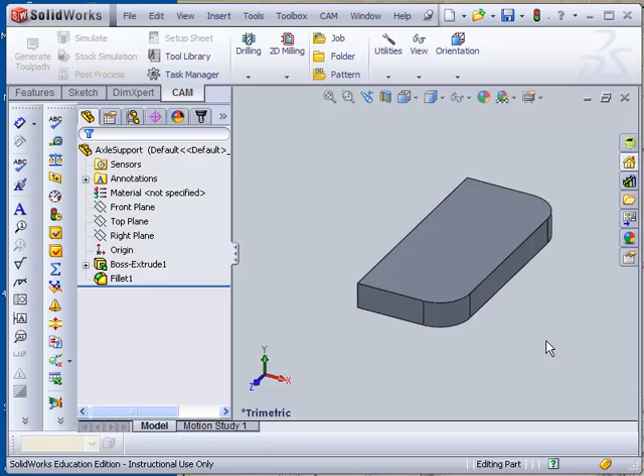This is video 2 in the axle support, and what I'm going to do now is to move this around and add that part that comes down as an extension. We'll go take a look at it from the left hand side, zoom out a little bit. I'm going to hold the control key down and just pan up.

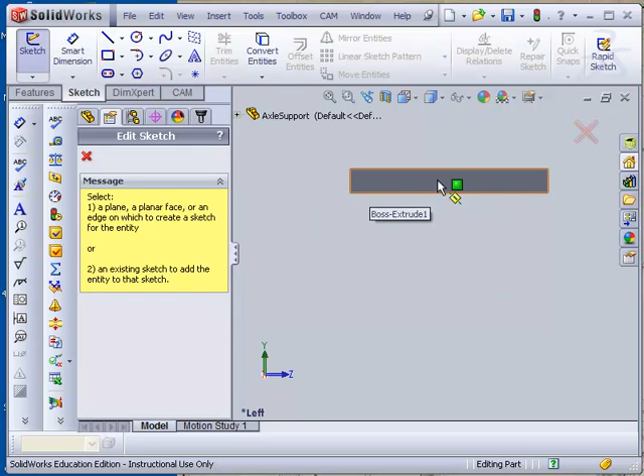I'm going to start by going to sketch, and because this is a symmetrical part, I'll start by putting a center line. I'm going to sketch on that surface right there, on that plane. Go up above the origin, left click, go down through the origin. Center line is black. Now I'm going to draw a circle on the center line. I'm going to bring it out so it's close.

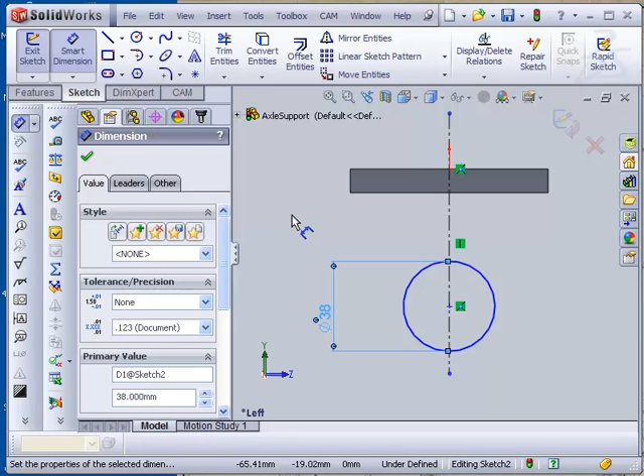Start adding some dimensions. The radius of that is 19, so the diameter would be 38. Now I'm going to put a dimension from here to the center of the circle. The distance down is 48. That puts it in place. Now we can start adding the sketch lines.

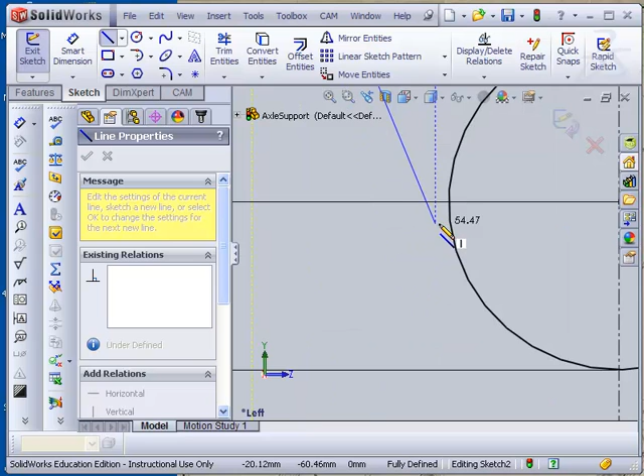I'm going to start by sketching on this edge, right where it intersects. And you see I get a midpoint. Left click, go to the corner, left click. Now what I want to do is to come right in and make this line coincident with that circle, but also, you'll notice as I drag down a little bit, tangent. So that second little glyph that shows up right there, that's tangency. Now that line will both touch the circle and be tangent to it.

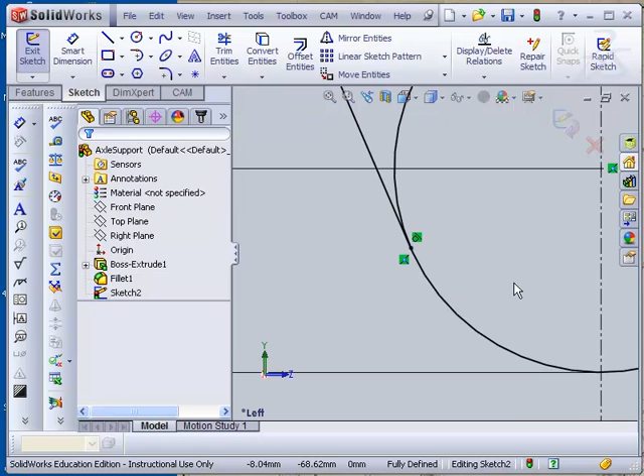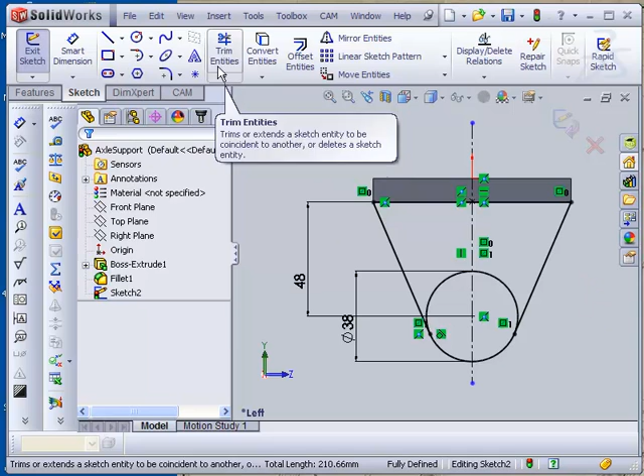Hit the escape key, come back out. I'm going to use the mirror option for the sketches and take that line and this line, mirror them about my center line so they look like that. Pick the OK button. Now what I've got is the whole thing sketched out. A couple ways to go from here, but I'm going to start by trimming out, using the trim command, that part of the circle and this part of the circle. I have now a fully defined sketch.

I can go over to the Features tab, do an extrusion, bring it around a little bit, switch it so it goes the other way, select the green button. Now that part's in place. Now the other thing left to add, for right now, at least in this video, is the raised boss.

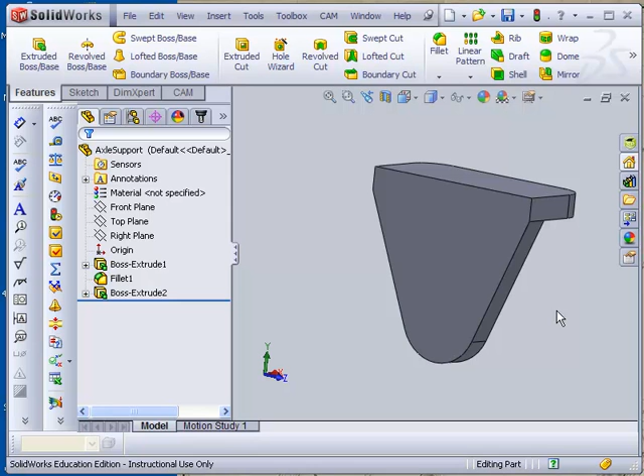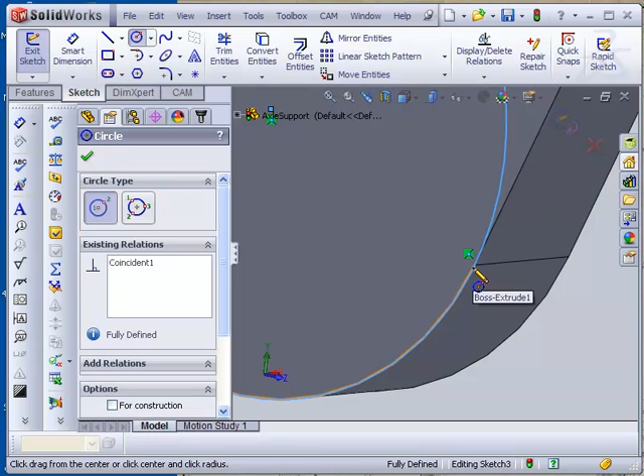I'm going to go back to Sketch, go to Circle, select that surface because that's where the raised boss starts. Hover over the edge of that radius till the center shows up, snap to the center, and now I'm going to come all the way down and just snap to that point right there. You'll notice I'm getting both a tangency and a coincident relation, which is what I want because that'll fully define that circle. Later on, if I change the size of that radius, it'll also change the size of the raised boss.

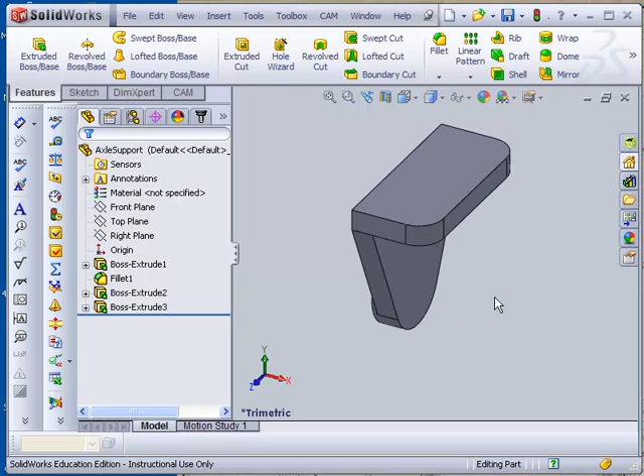Come over to Features, Extruded Boss, type in a 2. Now I've got that feature and I'm ready to put holes in it and put holes in the top as well. This approach differs a little from one of the other videos that shows the extension coming down and drawing half of everything including the arc. But I've changed my mind since I did that other video, and I think it's more effective to put the circle in.

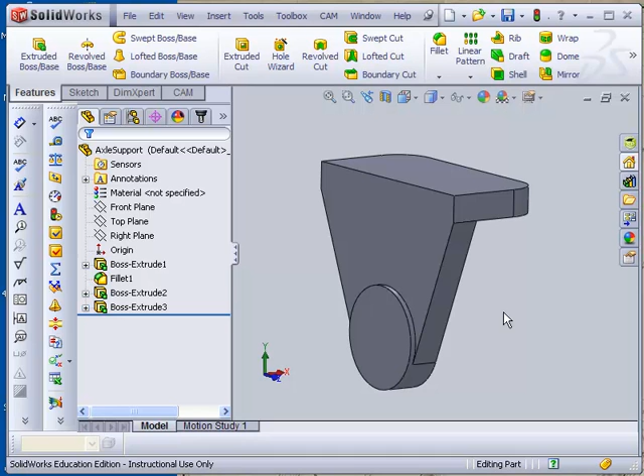I'm going to make one more video on this part showing how to do it using contours where you can put the entire sketch in one place. I'm going to call this the Paul Gilman approach because Paul was the one who showed this to me in one of the classes, and I think it's an interesting idea, so there'll be a separate video on that. But the part about adding the pieces one at a time still works. That's what most people do, but this other method of Paul's I think has really got some value, and I want to show it to you in a different video.